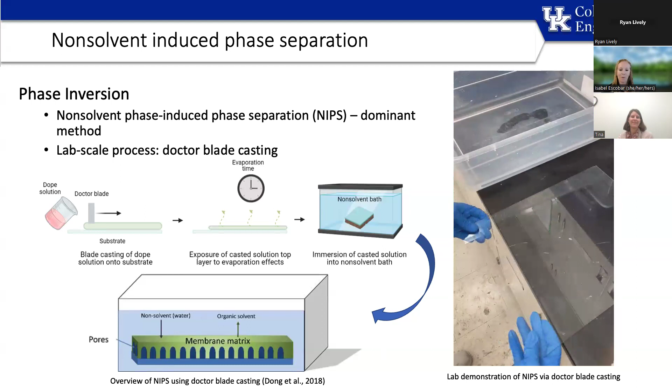There it is. And here's an image of David—this is David Blue's hands making the membrane. I forgot to say in the introduction that he recently defended his dissertation, on February 27 of 2025. Here he is just demonstrating the NIPS process—how the organic solvent leaves the dope matrix and goes into the non-solvent bath, that's water, and now the waste is that organic solvent in the water bath.

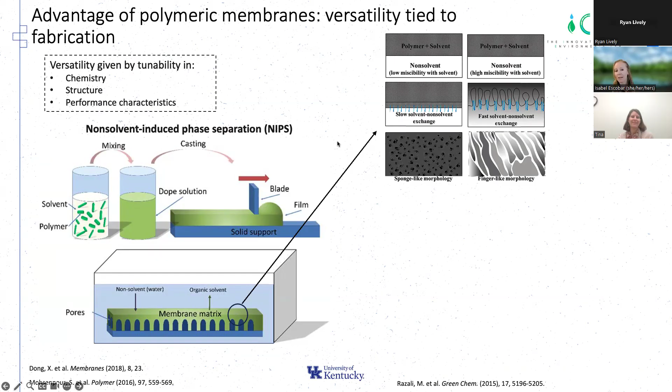So again, we use NIPS because it's versatile—it gives us a lot of power over chemistry and a lot of power to tune membrane performance. We have the polymer and solvent, we can put a substrate under it, a polymer support, or make it a freestanding membrane. We can tune the evaporation time. We can use a combination of polymers and solvents to increase or decrease the precipitation time, and make our pores more sponge-like or more finger-like, all in the choice of polymer and solvent and in how fast the phase inversion occurs. So this gives NIPS a lot of power.

On the flip side, we have the drawbacks of NIPS. The drawback is primarily that we now have as waste the solution made of organic solvent in water. Back in 2015, a survey was done and published on how that organic solvent concentration in the water bath is addressed.

And it was found that there's a lot of just sending it down the drain if the amounts are allowed to be sent down the drain, paying fines to do it, contracting a company to take it and treat it in-house if the producer is too large, or dilution.

And dilution is not the solution. That's one of the things that I love to say here. Dilution is not the solution. We do not want that to go down the drain.

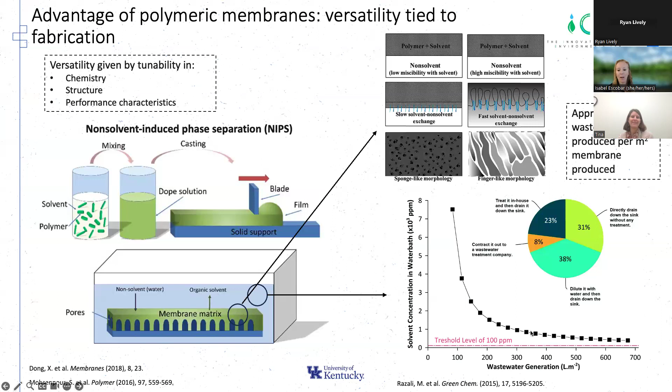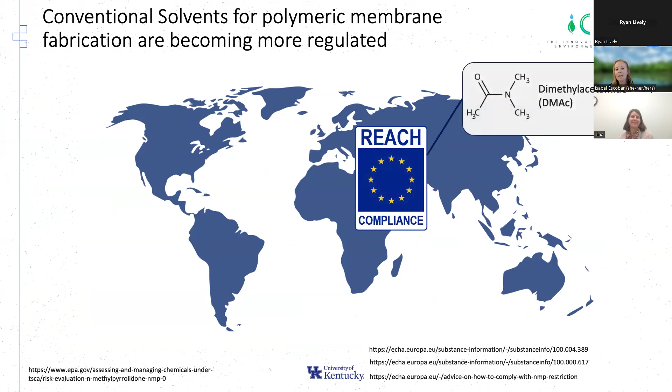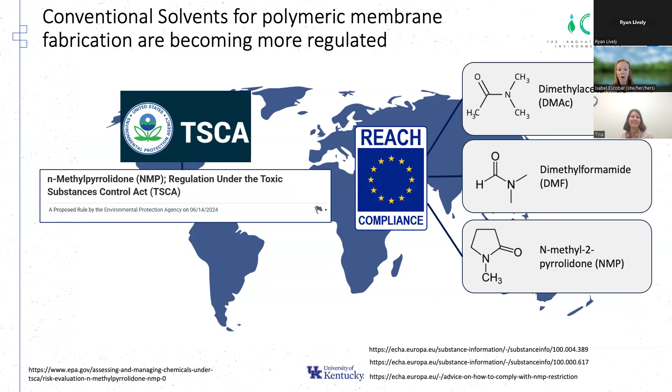But since the early 2010s, I've been particularly following rules that have been happening worldwide, especially with the use of solvents for the fabrication of membranes. In the REACH authorization in Europe, a lot of organic solvents were either banned or listed as their use is not ideal and should be avoided. Then following, the US EPA also started regulating toxic substances. So now there's a much greater look into the use of these organic solvents because of their toxicity.

And that was one of the drivers when I moved to the University of Kentucky to start focusing a lot more of my work towards green solvents, towards trying to make membranes with similar characteristics as those with the traditional solvents, but using green solvents.

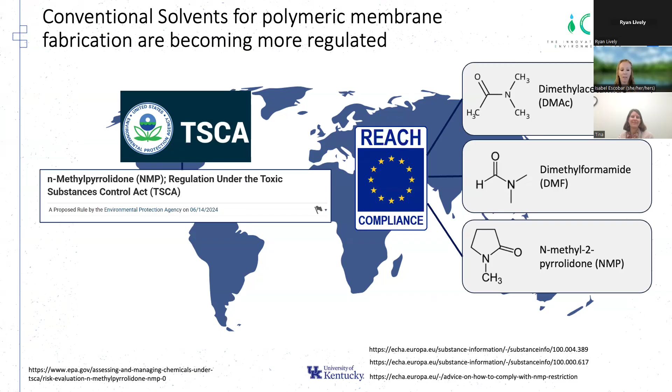So again, we have the conventional solvents like DMAc, DMF, NMP, etc. There's a long list of them, and they are flammable, volatile, toxic, non-biodegradable, non-renewable. They have just a heck of a lot of undesired characteristics. They're not desired to be in the wastewater, not desired to be in a receiving water, and are just not desired for operators, engineers, students, or anyone to work with.

So we have focused a lot on replacing them with green solvents. Green solvents are primarily defined as those that have low volatility, low flammability, come from renewable sources, are biodegradable, and have lower toxicity. Here we have some of the most famous ones like Polar Clean, GVL, Cyrene, ethyl acetate, but there are others. This is just a short list of them.

The work on green solvents has been very quickly increasing throughout the world, which, by the way, makes me very happy.

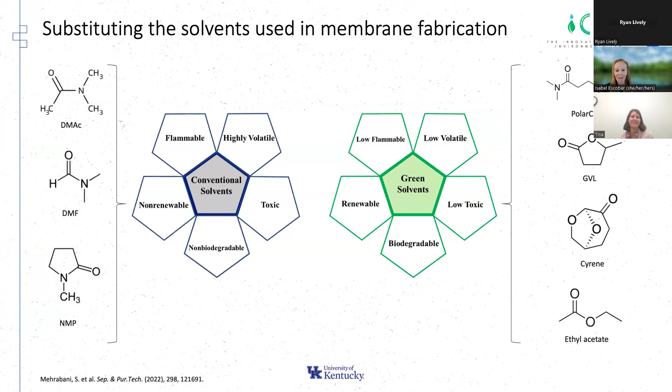Okay, so we start with doing the relative energy difference calculations. We use Hansen solubility parameters to first screen. This is our number one. We take the polymer that we want and look at a variety of different green solvents. Is it even worth going down the path of looking at this solvent, or is it a waste of time because it absolutely would never dissolve? They're not compatible. In the RED calculations, what we have in the Hansen solubility is a combination of dispersive forces, polar forces, and hydrogen bonding, and how those interact between the polymer and the solvent.

I have a little schematic on the next slide, but I want to start with some limitations of this. For the selection, it is a great first selection. It is a great process to weed out those that absolutely are not compatible.

But parameters can vary with temperature. It oversimplifies the entire calculation, and the size of the molecules can also play an impact on the values. The assumption is made for RED that the polymer is this perfect sphere.

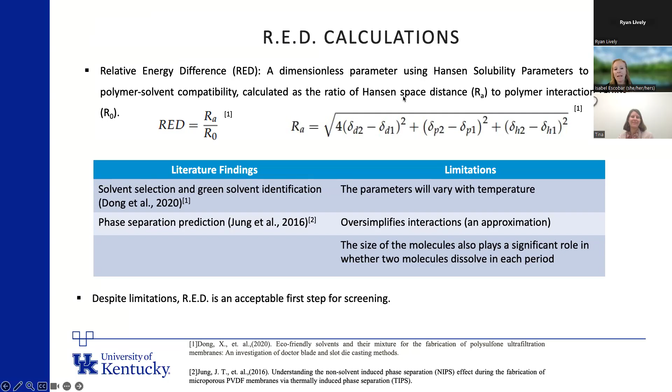And so in this perfect sphere, a good solvent with a relative energy difference less than 1 is one that can penetrate this perfect sphere. A bad solvent is one that cannot penetrate. So when we do the relative energy difference, which is the Ra divided by the R0, with Ra being the Hansen solubility distance to the polymer interaction, we see if that ratio is greater than 1, there is no way that solvent could ever enter that sphere. So it is considered an incompatible solvent for that polymer.

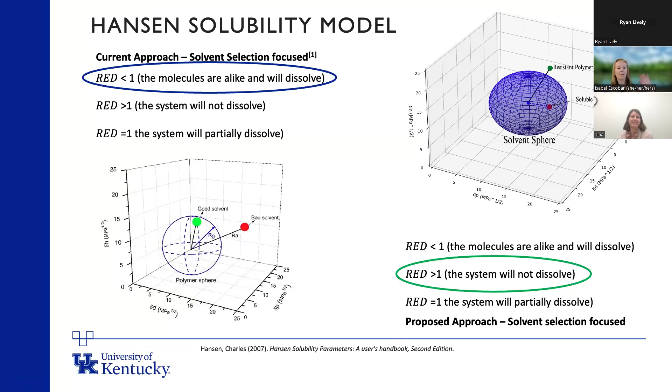On the flip side, for those that look at polymer-solvent separation, so polymers or membranes that would be resistant to solvents, they would be looking at the opposite. If the RED is higher than 1, we can definitely use the solvent in the separations and it will not dissolve the polymer at all. So this can be looked at both ways, for those making membranes for solvent separations and those of us trying to make green membranes.

So through the initial screening, we screened a heck of a lot of them, and we found that Polar Clean and GVL were the ones that had the potential to dissolve polysulfone, which obviously we went with. That's one of the workhorses in the membrane world. It's an incredibly cheap, powerful polymer. We all love polysulfone.

And from an academic standpoint, there are so many publications with polysulfone, we can always validate our work. So we like Polar Clean a lot because it's a chemical valorization. It's a byproduct during the production of nylon 6,6.

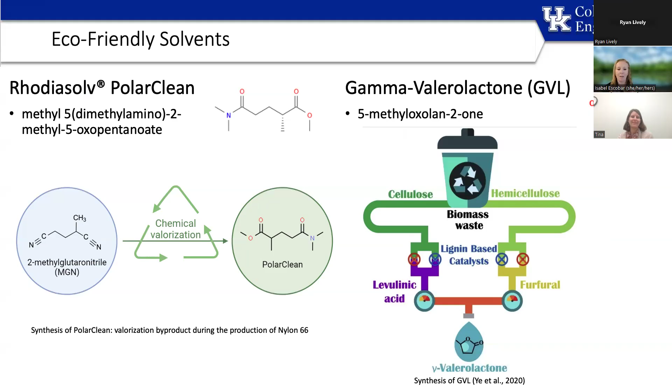And so the expected sustainability of that is significant. When we started working with this, our thought was that Polar Clean would be the absolute most sustainable one because of the chemical valorization. GVL, on the other hand, is biodegradable, comes from biomass, from cellulose, hemicellulose, and that process.

So our hypothesis here was that Polar Clean and GVL would be analogous to traditional solvents in order to make membranes. Now, we published a lot on this. Xiaobo Dong, who is chairing NAMS 2025, did a lot of work showing that structure-wise, there were similarities between Polar Clean and DMAC, between GVL and NMP.

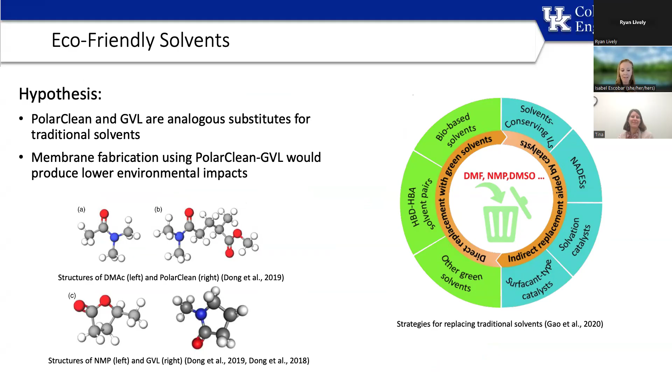And there were some characteristics that were similar. And because those RED values were less than 1, there was promise in those for their use to make polysulfone membranes. Some characteristics of them...

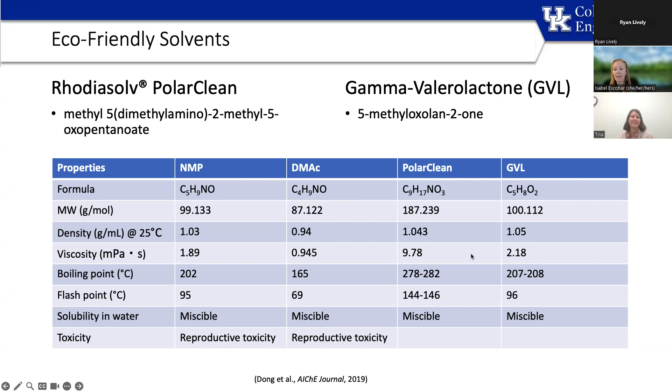As you can tell, they are larger molecules. Their density is approximately the same. Their viscosity is higher, and that is something that from just a purely chemical engineering membrane making lab, I didn't care at all to start with. But through my collaborations with Professor Harris, it became progressively more important that this viscosity has a really significant impact on the making of the membranes.

So as the first step, we usually do the RED values, and then we go into the thermodynamics, and we do our triphase diagrams. I am not going to go through all of the thermodynamics of this. As much fun as it would be, we just want to look at some very specific similarities.

For the first one here, we looked at just Polar Clean, polysulfone, and water, and we saw that Polar Clean and DMAC pretty much followed the same lines and behaved very similarly in those cloud point curves in the thermodynamics development.

Then through a lot of work, a lot of publications that we have done, we determined that ideally, in order to use GVL, as shown on this one, we had issues. There were a lot of issues with using GVL, and as we can see, especially down here in this lower side of the triphase diagram...

As we are close here to this 100% water, 0% solvent, we see that the composition path, which is the distance between the axes and the midpoint of the cloud point curve, is the shortest for the GVL, which means that it is the most thermodynamically stable, which means it's the least likely to be able to form a membrane.

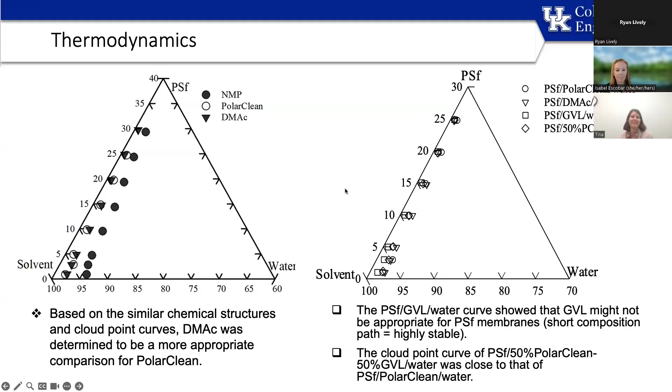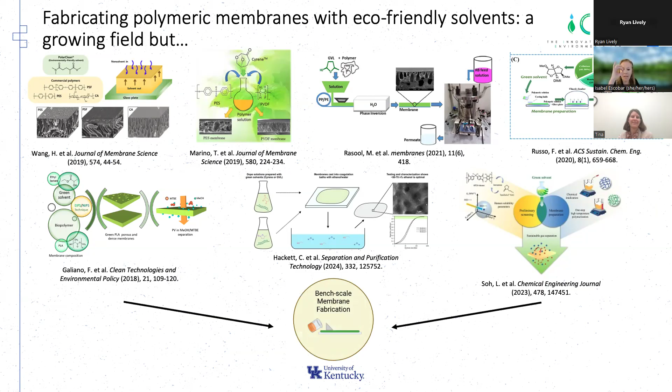So it's a field that is growing, but is limited to the bench scale. It is very limited to those of us that I love to say a large scale membrane piece for me is this. This is where we are. This is when we talk large scale.

And when I started collaborating with Professor Harris, we were talking about sending some initial samples to her for her to scale them up. And she said, well, how much can you send? And I was thinking 100 milliliters. That's a lot. That makes a lot of my samples that look this big. And I said, I don't know.

How much do you need us to make? And her reply to me was 1 to 2 gallons would be great. And I had a nearly pass out moment, because making 1 or 2 gallons for me at my bench scale size would be just an incredible effort from my students, from materials, for everything that we do, for even the mixing of the dope.

So over time, we got to where we were talking the same language. And recently, we published a collaborative paper in the Journal of Membrane Science that talks about one of the main hurdles of membranes and membrane development. And people like me live in this world right here. We make a new material, we make a membrane, we publish a lot, maybe we get a patent, we get a new grant, we make a new material, we make a new membrane.

It can do all of these awesome, wonderful things. And trust me, I make a lot of these. I know how awesome we can make them. I add two-dimensional nanomaterials to them. I add all of these fun functionalities. I do the processes - there are 4, 5, 6 steps to the making of the membrane, the addition of something that would make this piece be worth $1,000. I do all of these, and it's an incredible amount of fun, and it provides the world with pure science and pure understanding of how materials behave when they're in contact with each other.

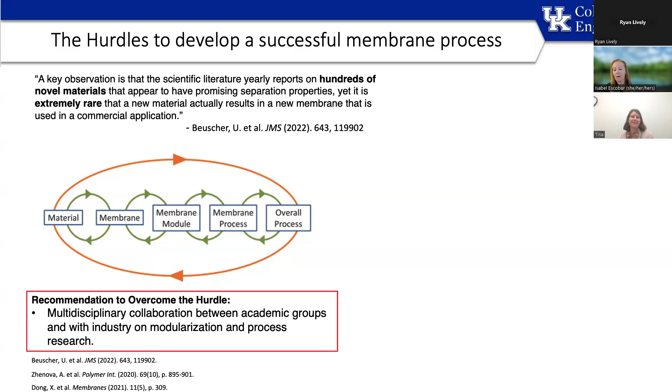And it requires multidisciplinary collaborations because I absolutely don't have the knowledge for scale up. I don't have the knowledge for slot die casting that can take this piece to this piece or larger. She can make as long as I can send her enough dope, she can make larger and larger pieces. So multidisciplinary collaborations like that are needed because, as we are going to discuss, there's a lot here that is absolutely not trivial and is incredibly difficult science.

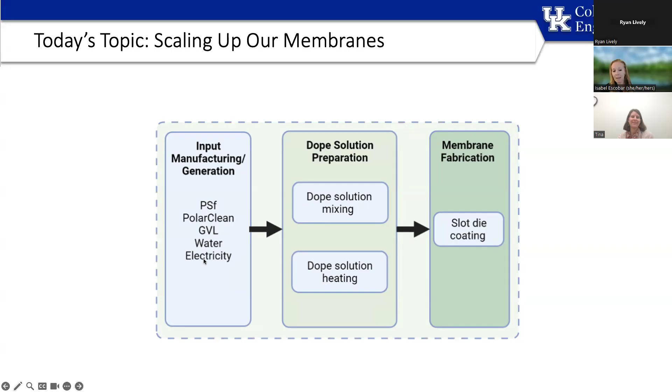So that leads to the point of my discussion today, which is using polysulfone, PolarClean, GVL, water, and electricity to making the dope, potentially heating the dope, and making some slot die coating. So again, this is our objective.

We'll start out with characterizing the dope and looking at slot die fabrication, at this, what you see here in the dark blue. This is the dope solution becoming a membrane through NIPS. We did it either on the glass plate or on a support layer. And we compare that with doing the Dr. Blade in my lab, the slot die, and we compare NMP, DMAC, and the PolarClean GVL solutions.

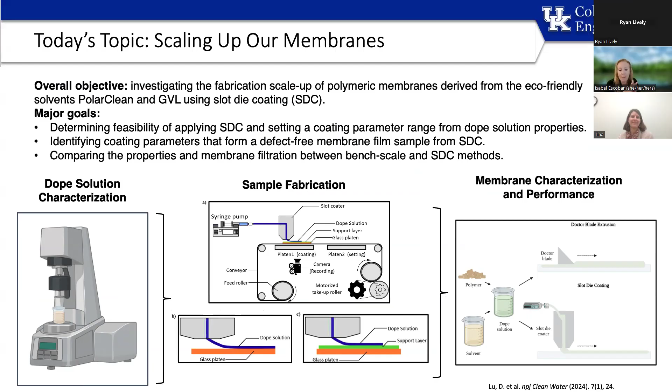So remember when I talked about the viscosity? Here comes the viscosity again. The viscosity significantly impacts the slot die casting. It impacts the processing because in the slot die, we have the dope in the syringe pump and it's pushing through the slot coater into this thin film. So it is not the manual Dr. Blade that we have power over, but it actually requires the ability for that dope to have a flow rate. So we all know fluids and we all know all of those laws, and we know that the viscosity is going to have an impact.

And we need to have limits within the viscosity because we need our dope solution to be a Newtonian fluid. As it starts to behave as a non-Newtonian fluid, NIPS will no longer work as NIPS, and we will start to have issues in making the membrane. That membrane will no longer have homogeneous properties throughout the membrane.

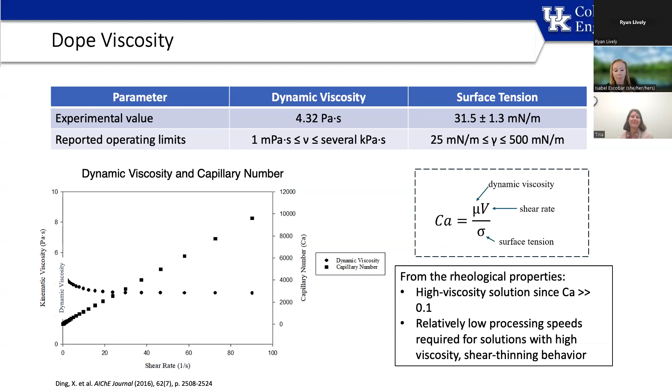So now looking at the slot die coating, these are prediction formulas developed in Tequila Harris's lab that relate the velocity right here of the substrate, which again can be glass or a porous support, to the flow rate of the dope solution coming down, any pressure that is put here, and surface tension, and within the surface tension we have the viscosity. And for every single dope solution, for every single combination of polymer and solvent, we have to develop a casting window.

And this casting window is where we have perfect casting, where we're going to be able to develop a membrane that has homogeneous properties throughout, where every single piece of the membrane will provide the exact same permeability and rejection.

When we are outside in this area where potentially our flow rate of the dope solution coming out is too high, there's going to be an accumulation back here of the dope solution, and it's called dripping. And some evaporation starts here, and we're going to have a very inconsistent membrane, a very inconsistent separation selective layer at the top of the membrane.

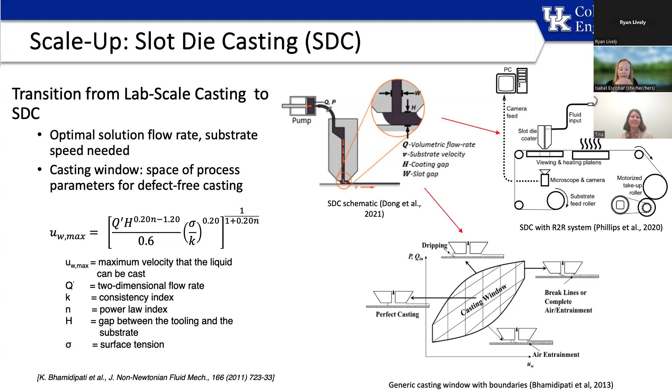And if we are over here in the bottom where the velocity is too high, but the flow rate of the dope is not high enough, we have some air entrainment. So we're going to have a lot of bubbles, very large bubbles within the membrane that could potentially explode or collapse during filtration.

Another issue that we have when we're dealing with a Dr. blade, we're dealing with a stainless steel Dr. blade - it is what it is. With a slot die coater, we can have glass, aluminum, or stainless steel for the coater itself, and all of those provide different contact angles with the polymer, with the dope solution. So those also impact the ability on how well that dope comes out through the slot die and makes a membrane.

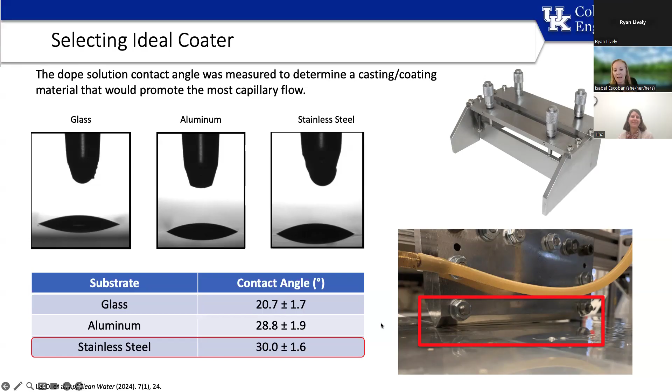And here we have a membrane made with aluminum versus a membrane made with stainless steel. Hopefully you can see that there are some imperfections here on the side. There are some squiggly lines, more squiggly lines back here, and that's all because it is interacting. Just a 1-degree interaction leads to additional issues and additional interactions and problems.

So we determined that the stainless steel was the optimal. And here's just a membrane being made at Professor Harris's lab.

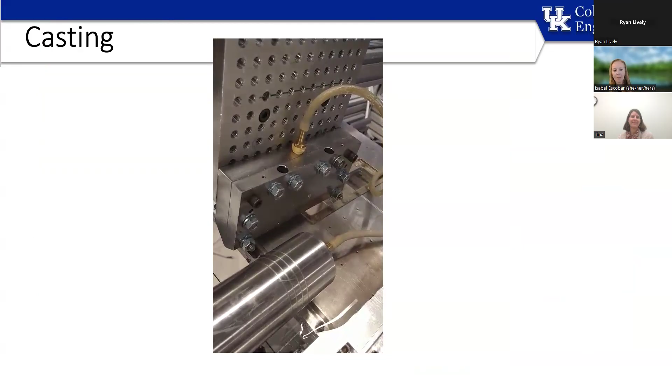And so this is how we proceed. Now, when we have a new dope, when we have our dope with our green solvent, we have no historical data on how this is going to operate. So we have to develop a casting window by ourselves.

And if we start out with trial and error, we can get to where we have dripping - so these are dope lines that are just not making a membrane. Or we can get it to where it is a membrane, but it develops scratch lines, again, because our flow rate and our velocity are not matching correctly, and so they're not making a viable membrane.

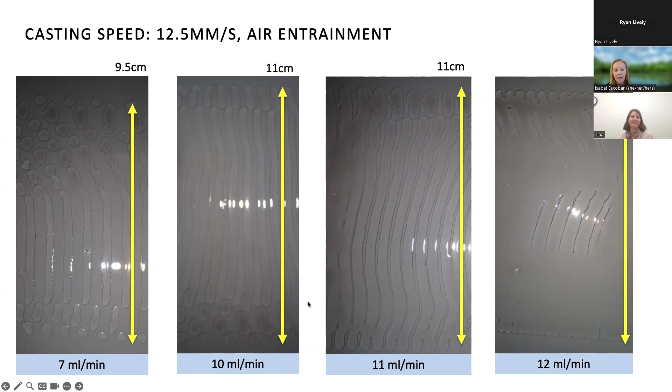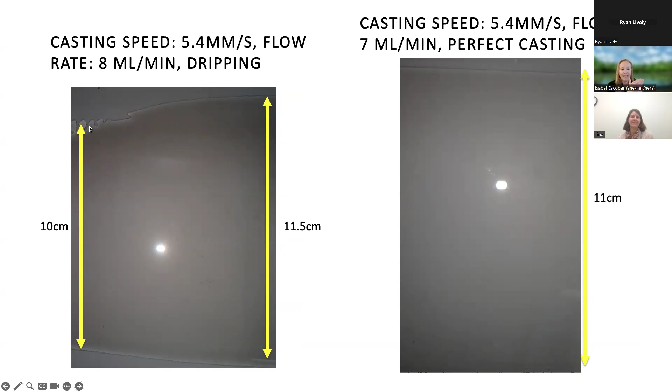And we can make, again, just by making - here's an example of dripping, where the membrane is really not making, and the edges are not uniform.

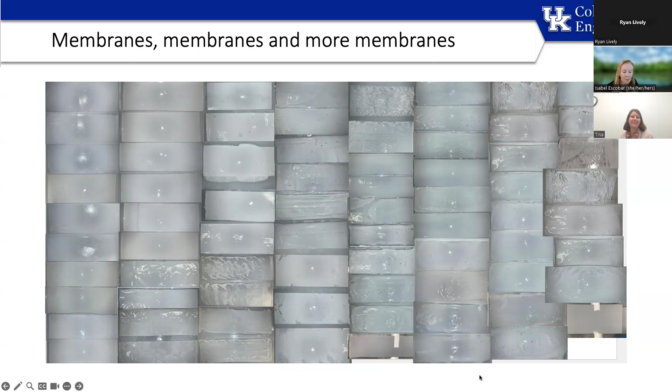And as my student David loves to show, we can make dozens, hundreds of bad membranes. We can waste gallons and gallons of dope solutions in attempting to determine what the casting window is for our green solvents. And any modification that we make - say we go from 17% polysulfone to 18% - we're potentially redoing the entire casting window. So it is labor intensive and is not effective.

So Tequila's group developed a numerical modeling, and they're using Interfoam, which is within OpenFoam, in a manuscript that is out in press right now. It has just been accepted for publication, and it's a model of the slot die coater.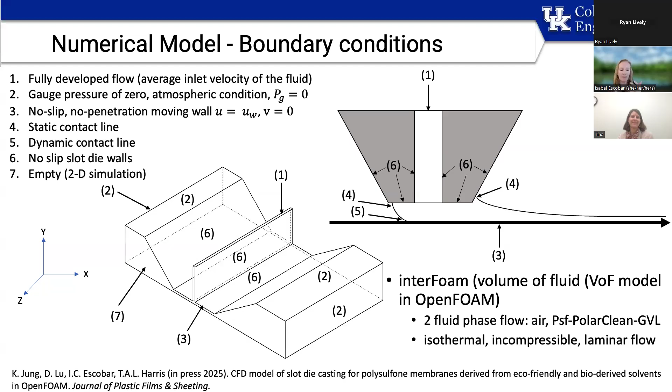I'll show a couple of the videos, though I might move around a little bit. So this is again the side view, this is the slot die coater, this is the dope solution coming through the slot die. We can set a flow rate, we can set a casting speed, and we keep the coating gap at 0.2 millimeters here, and we look at the residual.

The residual, we want it as tight and as linear as possible during the simulation, because it means those will be the perfect casting conditions. If I move this here just a little bit, we can see that this case would lead to a perfect casting condition. The dope is moving at an appropriate flow rate over time. I'm not going to let the whole video play, but we don't have dripping in the back, and we're not moving so fast that this dope starts to have break lines and significant air gaps.

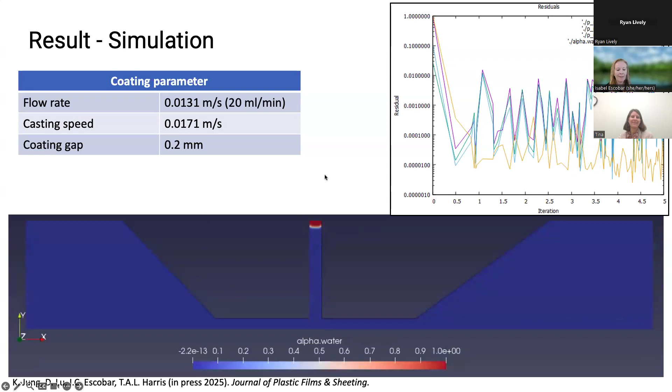Okay, this is the second video, and the first thing you can see here is how the residual is now a heck of a lot more erratic. The residual is bumping a lot more, and this is because as we start our casting here in the simulation, we now see that potentially our flow rate is too high for the speed of the substrate.

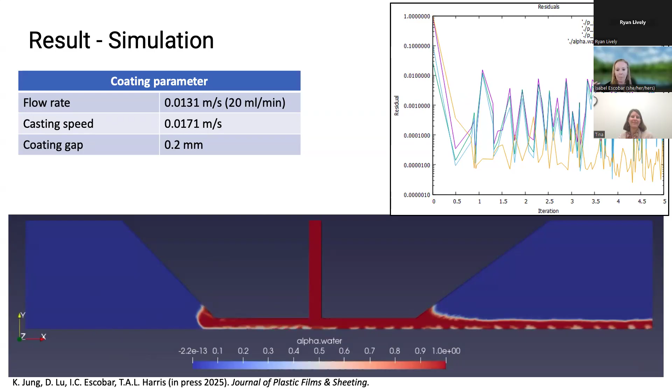And now we're starting to get an accumulation. The dope is starting to accumulate to the back, and soon we have the issue of dripping. So now the dope is accumulating here. That is not desirable. We're starting to have some evaporation of the solvent here, and now all of our conditions, we also have an accumulation of the dope. So now the membrane will be incredibly uneven with terrible properties, and something that will not work in the end.

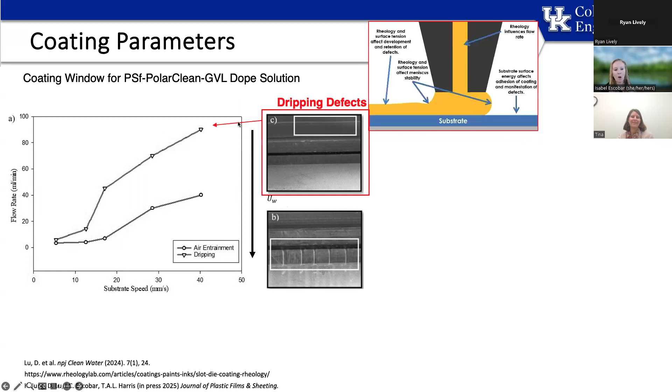After making many of these, we can either do these by hand, and this part of our casting window was developed by hand here, and you can see we have a few data points, about 8 data points. The top are the dripping defects — again, the flow rate is too high, and we start to get unevenness at the edges of the membrane. The bottom is air entrainment, where we start to have bubbles exploding within the membrane.

And when we do it with the simulation, we were able to validate that simulation. So here, these are the experimental results, and these are the OpenFOAM results — within the same range, they follow the same trend within the same standard error. We were able to continue that casting window. So being able to use the validation with OpenFOAM shows that we can indeed simulate how the dope behaves within the slot coater.

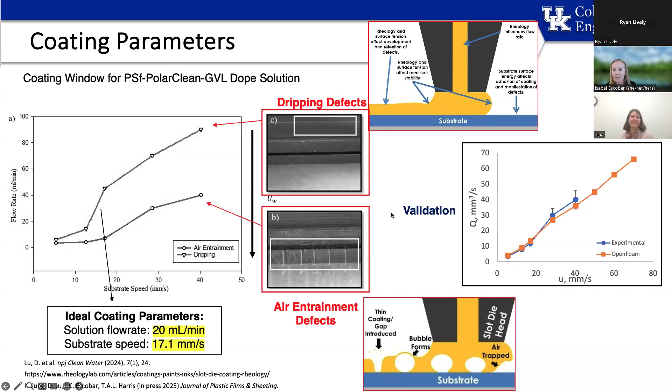So then to continue on with this project, we wanted to also add a support layer to the membrane, because obviously membranes have support layers. We love to make membranes without them — that way they're just easier to make. But the actual casting on the support layer using the slot die coater and our doctor blade showed itself to be more complicated than we had expected.

And so the purpose of the work — we published this last year in the Nature Portfolio journal Clean Water — what we did was make a full comparison of doctor blade and slot die coating. We made the membranes both on a glass support, and then we just put them on top of a support paper for filtration. We made them, and we also put them on top of the PET non-woven support, the Hollytex, for filtration.

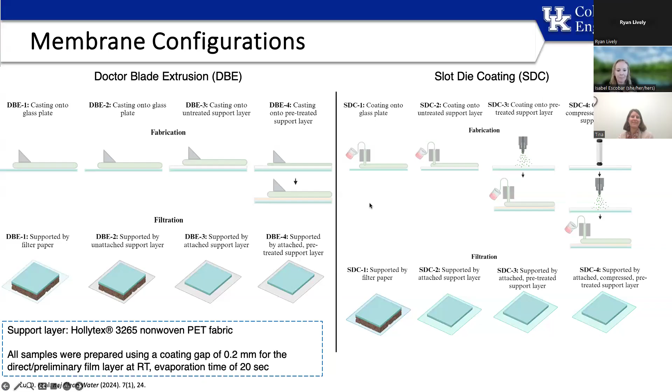And we looked at how well those were attached to the membranes — how well the support and the membrane were attached to each other. We went to some ASTM methods in order to determine the classification and determine that attachment.

ASTM has a method where a grid is made on the membrane — you can see it here, and this is what the grid looks like. It then provides details on how to attempt to scratch and pull it out. On observation, if none of it comes out, it's considered a 5B. If all of it comes out and there's absolutely zero sticking to the porous support, it's a 0B. Then there's everything else in between.

The first thing to notice is that the slot die made a better attachment. Now, in some of the cases, especially here with the doctor blade, we were right there.

There was very little sticking to the porous support, even though we did the pre-treatment, as you can see in both of these. With the slot die coater, we had some cases with poor sticking, but when we sprayed the dope solution as a pre-treatment on the porous support, we were actually able to get good adhesion.

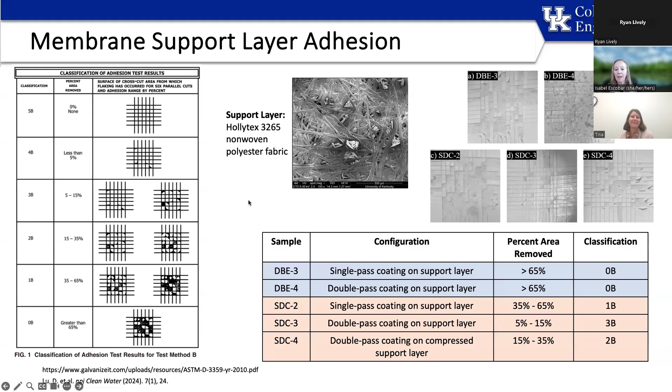To be in this 3B category is not ideal yet, and maybe we need to increase the spraying time, but we were able to develop something that stayed attached. In the way we performed the tests, this was not a significant issue because we just performed them under pressure and then did back flushing. But for scale up, this does become an issue, and it shows that the slot die coating was effective.

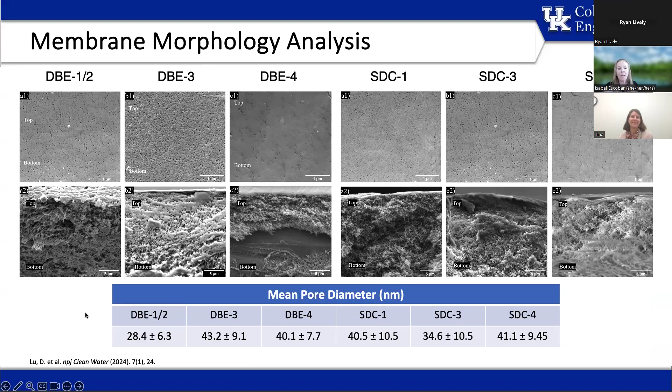We looked at starting some comparison between the Dr. Blade and the slot die coating, and we looked at a variety of SEMs, both the surface as well as the cross section, and we were able to determine that the mean pore diameters for all of them were approximately the same, and they all had a sponge-like cross section.

We did permeability using a couple of different solutions. We did a BSA solution because BSA is very well known. There's a lot of data for BSA using polysulfone membranes. And what we found is that we started with a pre-compaction, and that pre-compaction was more needed for those membranes made at my scale, at the scale of the Dr. Blade.

When they were made with the slot die coater, that pure water filtration pre-compaction did not show as significant a drop as it did with the Dr. Blade. However, when we started the BSA filtration under pressure, all of them performed at approximately the same permeability, and all of them within error had high BSA rejection, with the slot die coating membrane pre-treated with just the spray coating showing the highest BSA rejection.

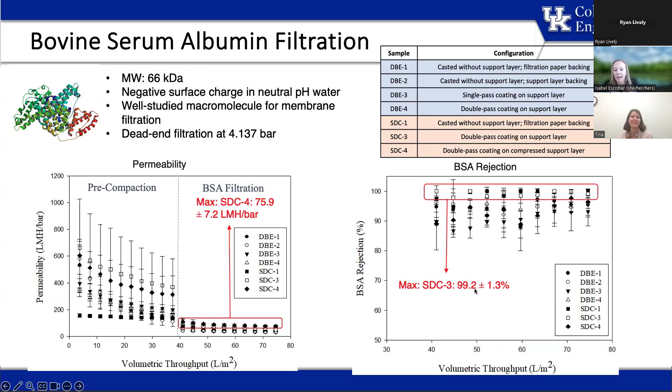We then used our second substrate, which was sodium alginate. This is primarily because it tends to stick more to the membrane. We again performed pre-compaction. We saw a little bit more variation on the permeability, but again, all of them showed pretty high permeability levels. Rejections were lower.

Obviously, we chose sodium alginate because it's more of a foulant. It represents natural organic matter more, and it has a wider variety of sizes. And we had, as expected, a much wider variety of rejections, but that SDC3, the pre-treated slot die coated membrane, did perform very well in both.

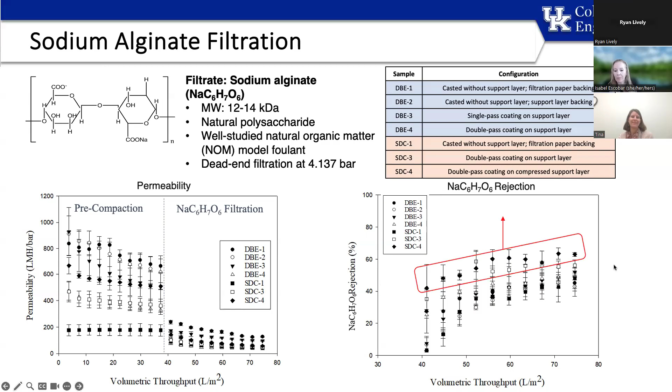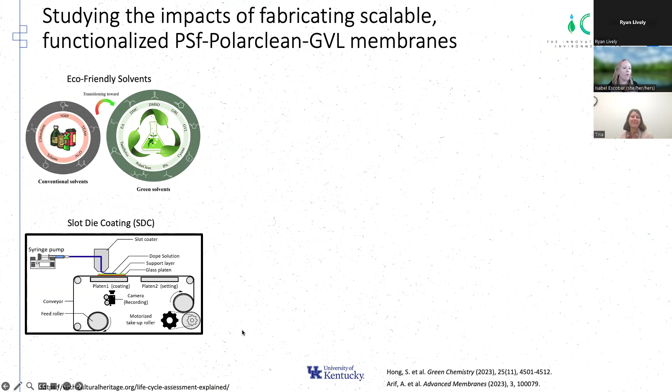So then we started thinking that we've made these great membranes, and we are publishing a lot on the making of the membranes and how they perform with these green solvents. But what we have not touched much yet is their sustainability. How sustainable is really the making of these membranes, of these green membranes?

And this is the new collaboration with Dr. Diana Burns from the University of Kentucky. Now what we're doing is, can we do a life cycle assessment on this? Now, obviously, there are a lot of boundaries to our life cycle assessment.

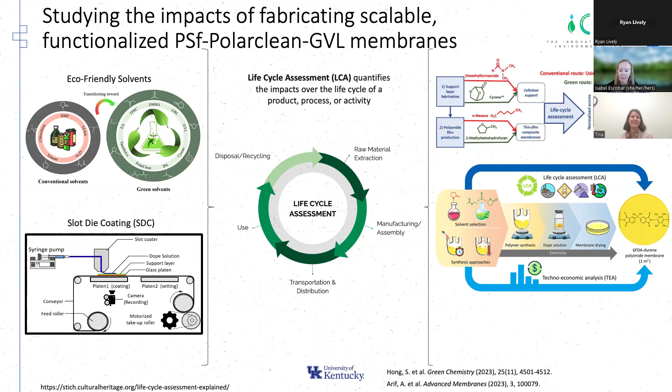We are looking at what is done at a small Dr. Blade scale and what is done at a slot die coater. We are not actually looking at a full scale life cycle assessment because there are a lot of parameters we don't have, and there's ultimate use and disposal. So we are looking at polysulfone and our solvents. We decided to compare with DMAc, NMP, and our Polar Clean GVL.

The dope mixing uses electricity. In order to make the dope, we have to do some heating of the dope and mixing, so we have some electricity here. During Dr. Blade, there is no electricity use because this is just student power. If I were to tell my students they would have to be plugged into power, there would be issues because there would be a significant safety concern. They're much more powered by coffee rather than by electricity. But the slot die coater is powered by electricity, and in the NIPS process we obviously have water.

Now, from back when I started the presentation, maybe about 35 to 40 minutes ago, I was talking about the viscosity of the Polar Clean. So now that viscosity comes back here as an issue in our life cycle assessment, primarily because we need more material, especially during the NIPS process, in order to get to our steady state. So there is use of more material for the Polar Clean.

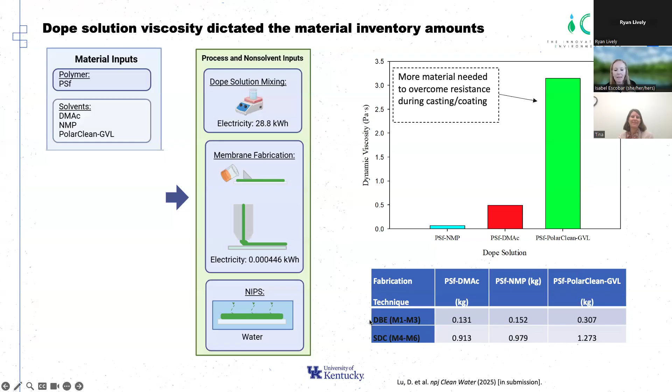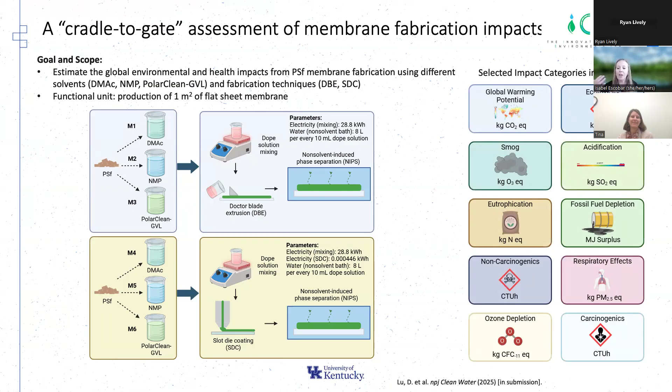For our fabrication techniques, I'm going to show you the 6 membranes that we made. We use PSF at the Dr. Blade level. We call them M1 with DMAC, M2 with NMP, M3 with our Polar Clean GVL, using slot die coaters, and M4 through M6. Important to remember is that M3 and M6 are the ones with the green solvents. We looked at effects with respect to global warming, ecotoxicity, smog, acidification, eutrophication, fossil fuels, carcinogenic and non-carcinogenic, respiratory effects, and ozone depletion.

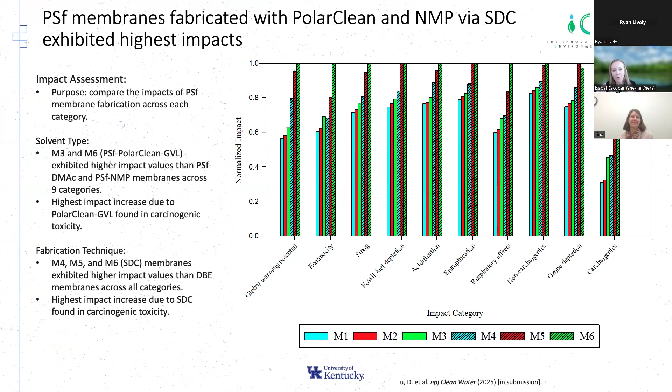We were very surprised to find that M3 and M6 across the board showed higher negative impact compared to the NMP and the DMAC when it came to the ones we were looking at. Obviously, they're all shown here.

One of the issues is the viscosity. The higher viscosity necessitates a higher amount of the green solvent in order to reach that steady state in the fabrication, compared to the other membranes, compared to pure NMP and DMAC, which are very low viscosity. So this was surprising to us. It was surprising that across the board, the green solvents actually came out to be undesirable.

When we were talking about just separating out the doctor blade only, the impacts were not as significant, though they were higher for the green solvents, but not as significant across the board. When we went to the slot die coating, we saw that just by using slot die coating, all of the impacts were higher. Again, we have to have some sacrificial dope solution to reach steady state, which we don't at the doctor blade level. The slot die coater does use power, and it produces a greater amount of waste than we do at the doctor blade level.

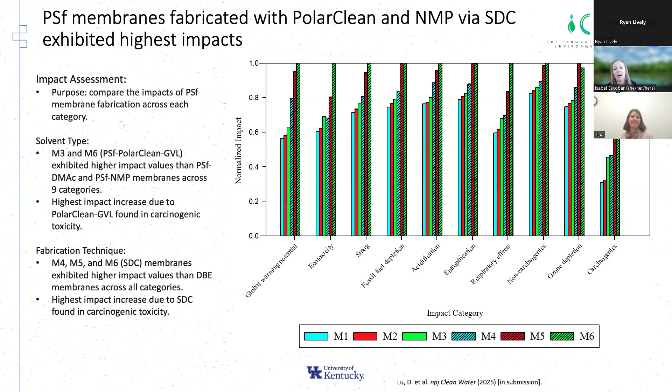So we are currently analyzing them further, analyzing residuals, and we are preparing a publication that should be coming out fairly soon. But to summarize, as we're approaching the 50 or so minute mark, what we have made here, we have used these green solvents.

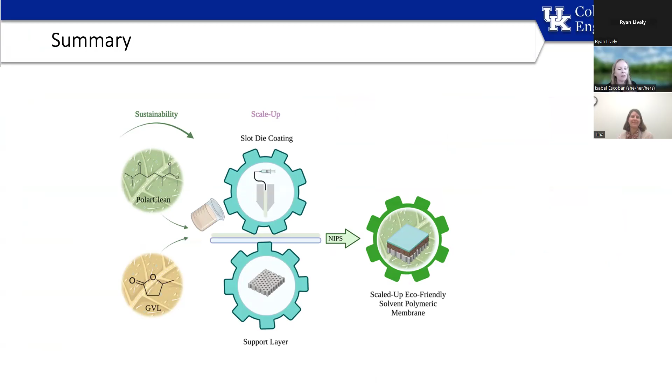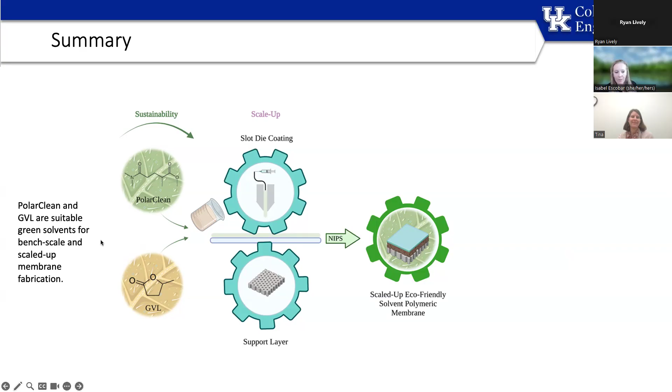They are suitable at the bench scale and at the scaled membrane fabrication. We have not looked at all membrane characteristics. We have not looked, for example, at mechanical strength here. We have in publications, but there are some issues with green solvents and mechanical strength. But those are also others that we're focusing on. We're looking, and other researchers are as well.

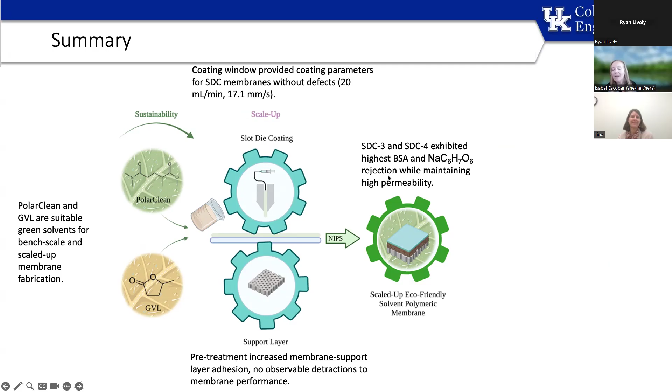We developed coating windows for the scale up. We determined that by pre-treating a porous support, we were able to successfully cast a membrane on it using the green solvents. And we were able to determine that the pre-treated support using slot die coating with the green solvents made membranes that have high rejection of BSA and sodium alginate.

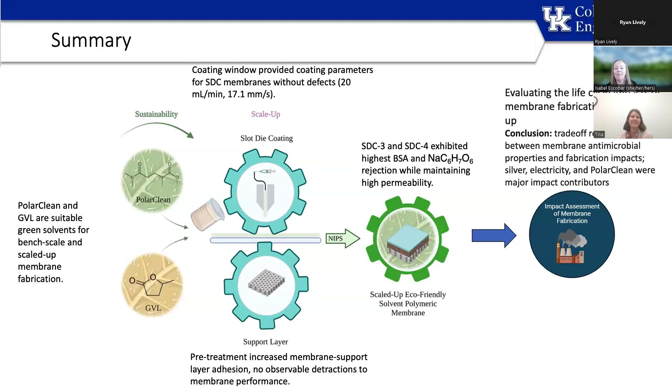But we're still working on that life cycle assessment. That life cycle assessment is still showing us that just simply calling them green and calling them better, it's just not looking at the full picture. There are other effects that come into play. There are the viscosity effects. There are the electricity effects. While PolarClean is a valorized byproduct, there are other issues associated with it as well because of that viscosity, because of those higher uses.

So in summary, it's not easy being green. We are trying. The deeper we go into the green, the more we find potential hurdles, but ultimately the goal is to develop something, to be able to get there. As Suzana Nunes once said, what we want is simplicity, scalability, and sustainability, the 3 S's. And that's what we're working on with my group.